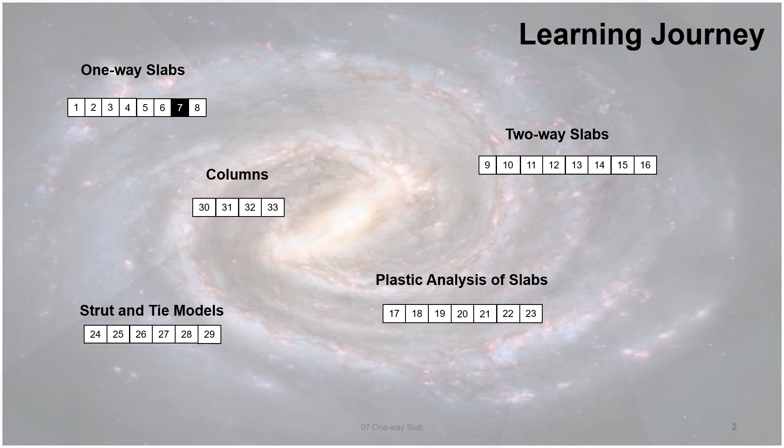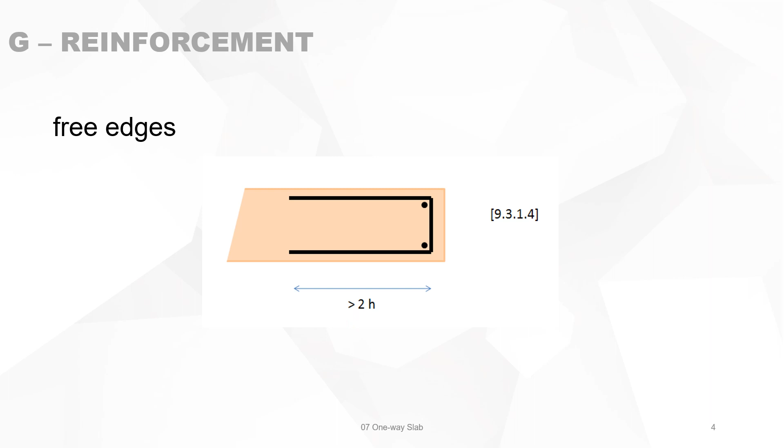Let's look at the free edges of concrete slabs. They always need reinforcement in a U-shaped rebar to close off the edge of the slab. The length of this U-shaped element is at least 2 times the depth of the slab.

The U-shaped corner reinforcement can, in general, be placed as mentioned here: on the outside, in the second layer is the main reinforcement, and the secondary reinforcement is on top of that.

But in fact, you have two different options. You don't need to use all those different layers, because a slab is normally like 200, 250 or 300 millimeters, so you do not have a lot of space.

So for the main reinforcement, you can put it in the second layer, and the secondary reinforcement is in the first layer, but in the same layer as the U-shaped corner reinforcement. That's an improvement, that's better. You avoid buckling out of the main reinforcement because now it's trapped within the secondary reinforcement.

But for slabs, because they are so small in depth, we want to use a maximum effective depth so that we have the least amount of reinforcement. In this case, when the main reinforcement is in the first layer, you can put the secondary reinforcement on top of it and the U-shaped reinforcement on top of that.

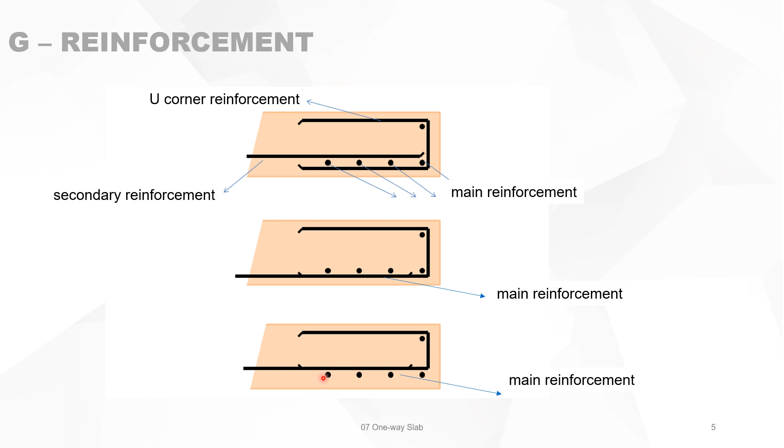Now for free edges, U-corner reinforcements are needed at all sides. You may not forget it. The U reinforcement in the X direction should preferably be placed in the same layer as the reinforcement in the X direction.

And all faces of the concrete need to be reinforced. And all reinforcement must be sufficiently anchored.

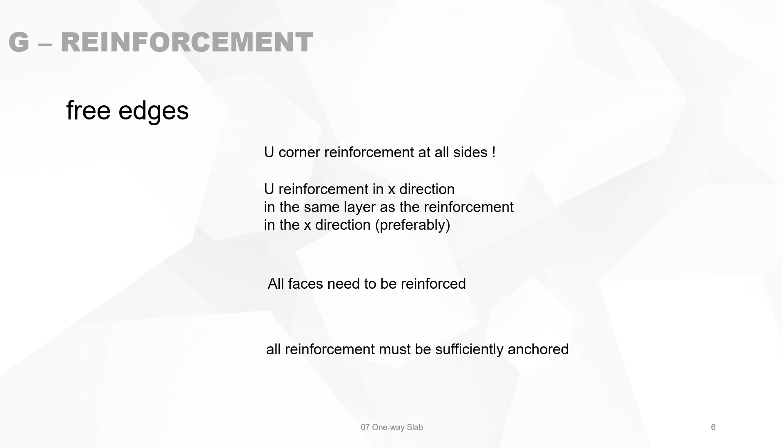Now we can have a quick look at the shear force. Shear force in slabs, in fact, is two-dimensional, and then we call it punching, which video 15 will deal with as punching shear reinforcement.

This is now the shear reinforcement for a one-way slab, and it's treated exactly the same way as for beams, but then for a section with 1 meter width.

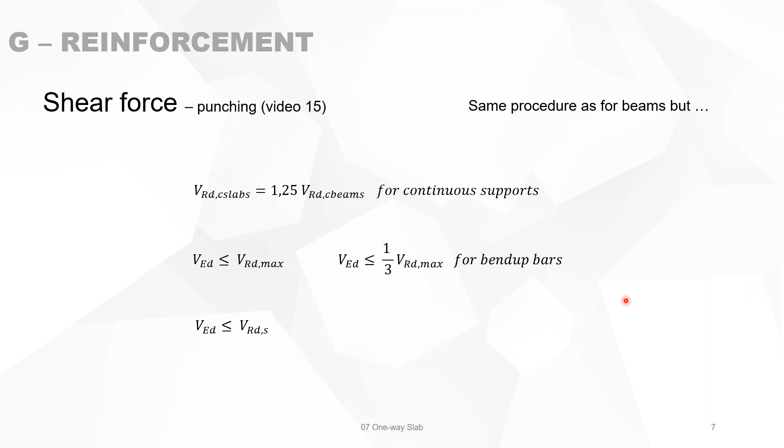There is one big difference: for continuous supports, you only need shear reinforcement if the acting shear is bigger than 1.25 times the resistance of the plain concrete in shear. So you have a 25% bonus. For all the rest, it will be exactly the same as we treated beams.

Now, shear reinforcement in slabs is a complicated thing. We can think purely theoretically about doing it with a precast slab, where the shear reinforcement is already in there, and then in a second movement you complete the pouring of the concrete on top of it. But this is not very practical. It can be done, but it's not very practical.

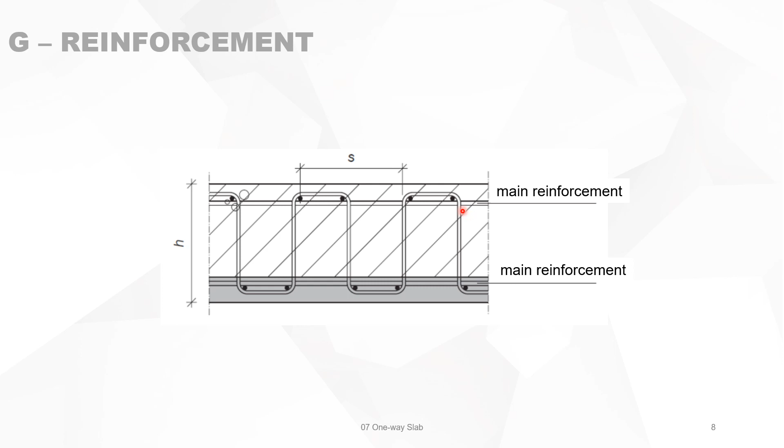Placing stirrups in a slab, you can see immediately that if this is the main reinforcement direction, you need a certain spacing rule in this direction, and you need a spacing rule in the second direction. It is rather complicated to achieve this, and it takes a lot of labor. And stirrups are, in fact, not possible when the depth of the slab is smaller than 200 millimeters.

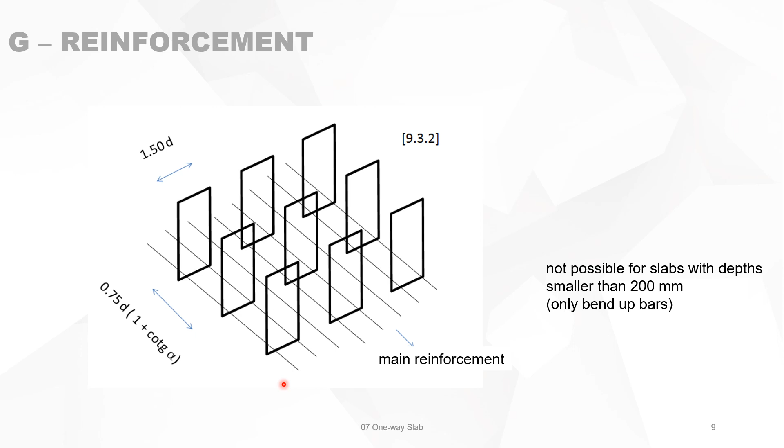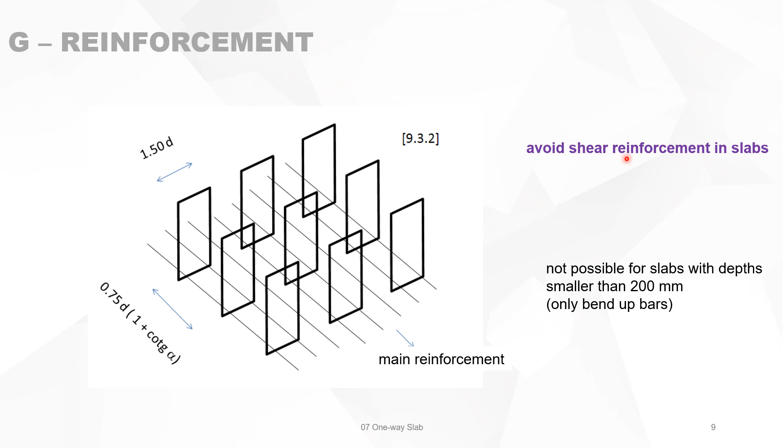Then you can only use bend up bars instead of stirrups. So we can conclude that you should avoid shear reinforcement in slabs at all times. Make the slab thick enough or make the concrete grade bigger, but avoid shear reinforcement in slabs where possible.

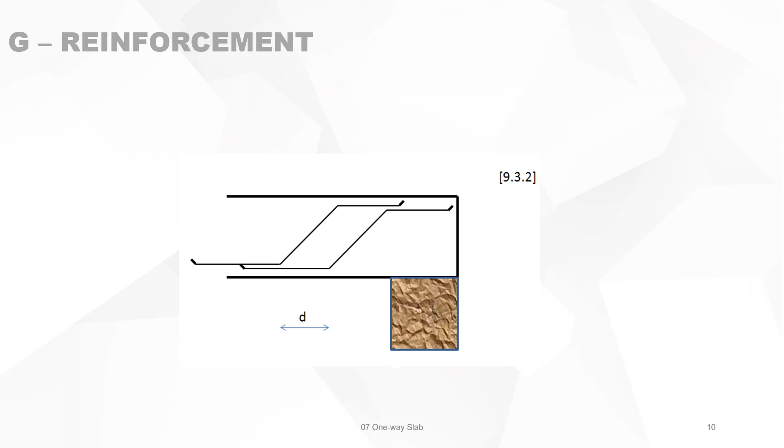Now something about minimum and maximum reinforcement. The minimum reinforcement for brittle failure is exactly the same as for beams.

Now for slabs we can fill in some values, and when FYK is equal to 500 megapascal, then this formula becomes this, which means the minimum reinforcement is 0.156 times the concrete grade to the power 2/3. And it must always be bigger than 1.3 times the effective depth of the slab. This is because B here is 1 meter.

To simplify it, for a concrete grade of C30/37, the minimum reinforcement is 1.5 times the effective depth of the beam. Now the dimensions are right because it's multiplied by 1 meter width, so it is square millimeters, in fact. D is in millimeters, and then you have square millimeters.

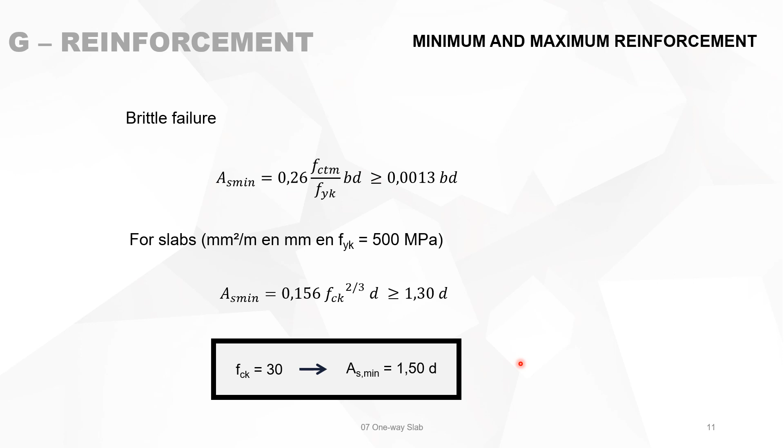For crack control, the minimum reinforcement for crack control is exactly the same as for beams. We can see now that the factor Kc is the same as for beams, it's 0.4 for bending.

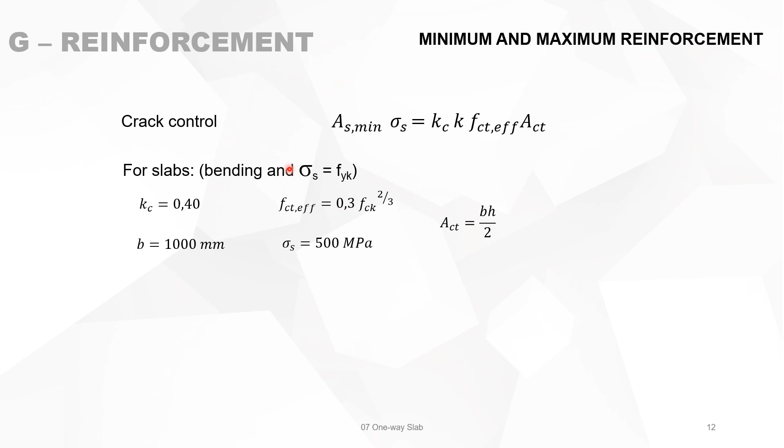And when we use the steel stress equal to the FYK, then you can rework those formulas a little bit. I'm defining A0, the basic minimum reinforcement for crack control, at 0.12 times FCK to the power 2/3 times the total depth of the beam, FCK in megapascal. And the factor K0 depends, it's a dimensional factor.

It depends on the height of the slab, according to these formulas. And now this can be converted into a simple formula like that.

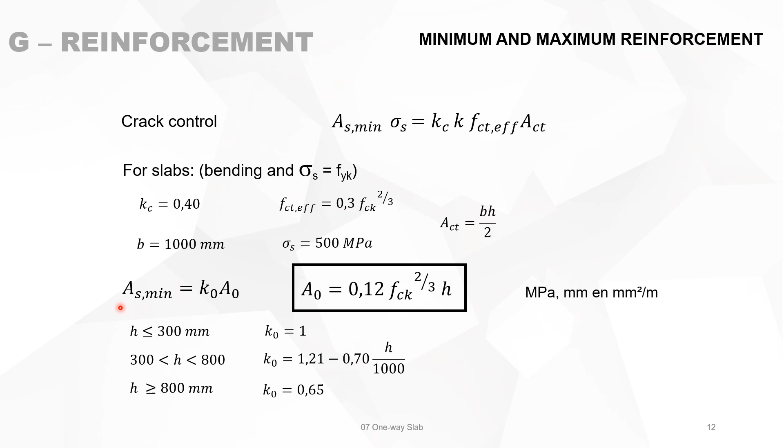Example of restrained deformation of a slab. We can use this formula for that.

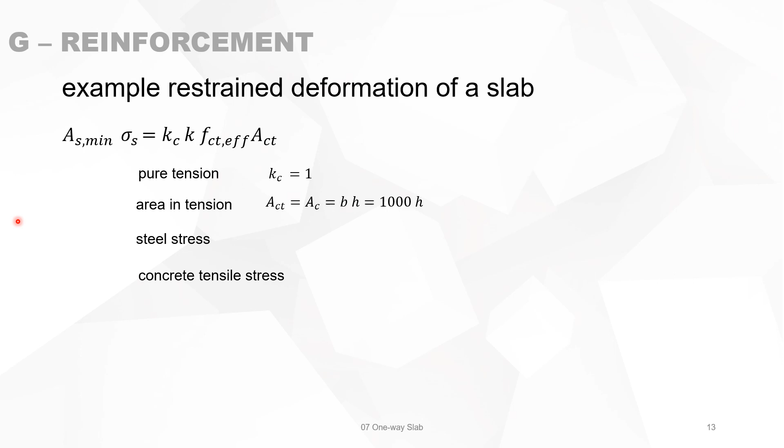For pure tension, Kc is 1, and the area in tension, when it's a restrained deformation, means that the total area is in tension, so it's B times H, or it's 1000 times the total depth of the slab. The steel stress equals 500 megapascal, because I'm not concerned here with a limit on the crack width. And the concrete tensile stress, this is the FCT,eff.

This should be the resistance of the concrete to tensile stresses at the appearance of the first crack, but we do not know that. So FCT,eff is most of the time taken as the mean value of the tensile strength, which is FCTM, or if you don't know, we just take 3 megapascal in normal cases.

And when you apply this formula, then this becomes this formula, which is very easy. The splitting up of the formula is because of that factor K, which is different in different cases, depending on the total depth of the slab.

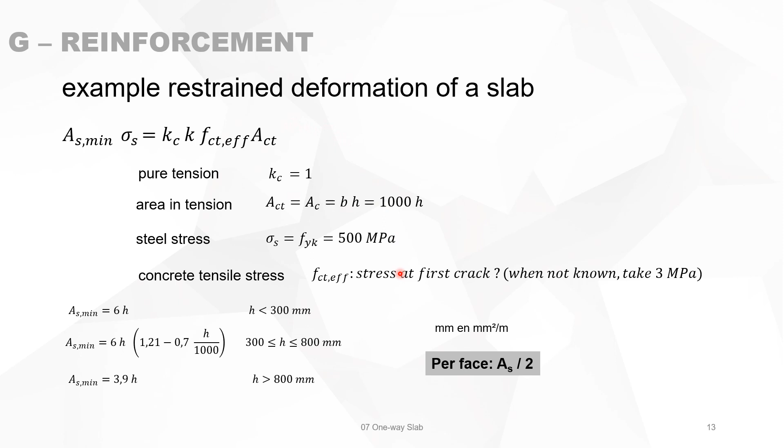Remember, we have chosen here ACT as the total area. It means that when you calculate the minimum reinforcement, the amount that you have, you divide it by 2, and that is the portion put in the bottom and on top. So it's always, when you compare minimum reinforcement, don't forget that for restrained deformation, you put half of it on top and half of it on the bottom.

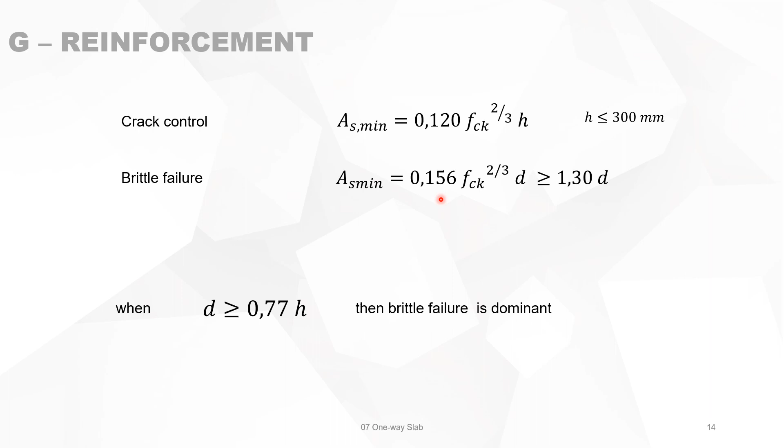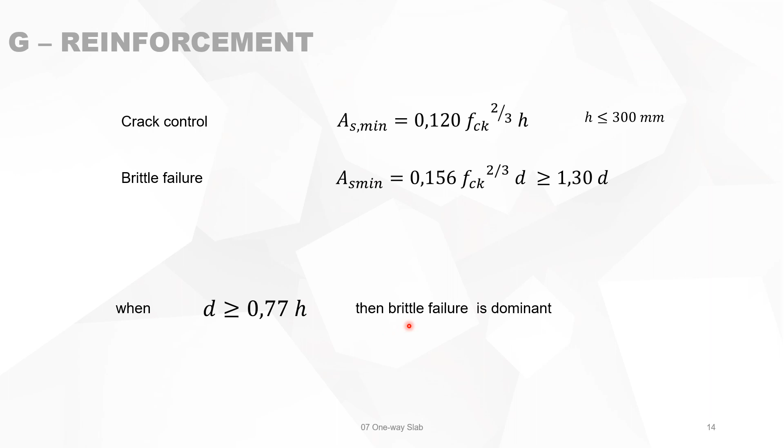For crack control, we have this equation. For brittle failure, we have this equation. Now we can easily see that when the effective depth is bigger than 0.77 times the total depth of the slab, then brittle failure is dominant. So that means that in a lot of cases, brittle failure is dominant, this formula is dominant.

There's also a maximum reinforcement, and the maximum reinforcement is 4% of the total concrete section. For slabs, it means that if you use units square millimeter per meter and millimeter, you see that the maximum reinforcement is 40 times the depth of the slab.

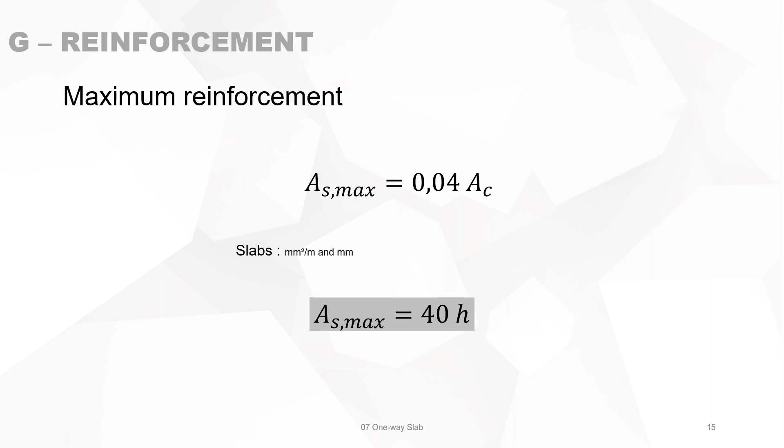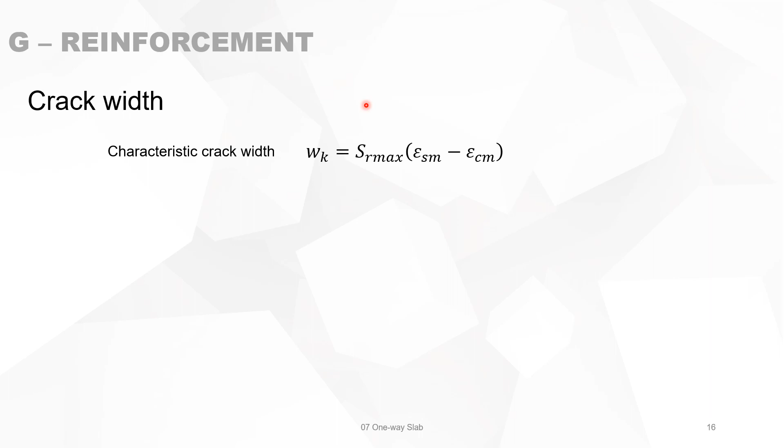Crack width calculations are exactly the same as for beams. Just a small reminder, the crack width is always the delta epsilon multiplied by the maximum distance of the cracks. So the SR max is the maximum crack spacing, and the epsilon SM is the mean steel strain, and epsilon CM is the mean concrete strain.

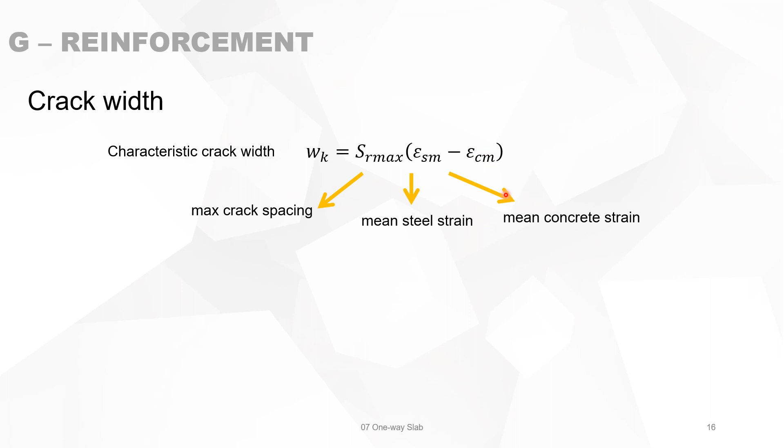And this delta in strain between concrete and steel can be written as this formula, with KT as a factor which is 0.6 for short-term loading and 0.4 for long-term loading.

FCT eff, like we said before, we can take as FCTM, the mean value, which is 0.3 times FCK to the power 2/3. Alpha E is ES divided by ECM, the modulus of elasticity of steel divided by the mean modulus of elasticity of concrete.

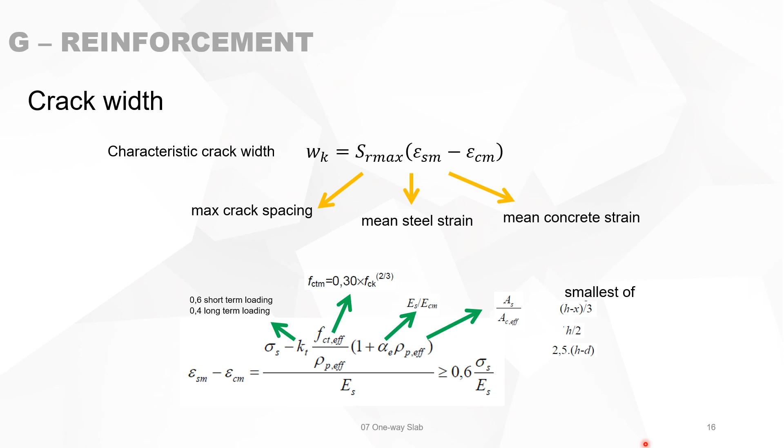The effective reinforcement ratio is the tensile reinforcement divided by the effective concrete area around the reinforcement. The effective concrete area is the smallest of B times h minus x divided by 3, b times h over 2, and b times 2.5 h minus d.

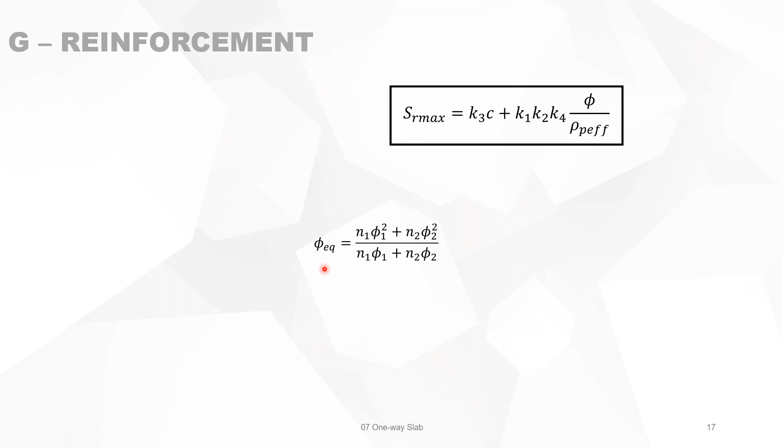SR max is equal to this formula. When you have different diameters of reinforcement in the same section, you have to take an equivalent diameter. K1 is for bond, so 0.8 for high bond and 1.6 for plain rebars. K2 is a factor giving the stress redistribution in the section, and K3 is 3.4.

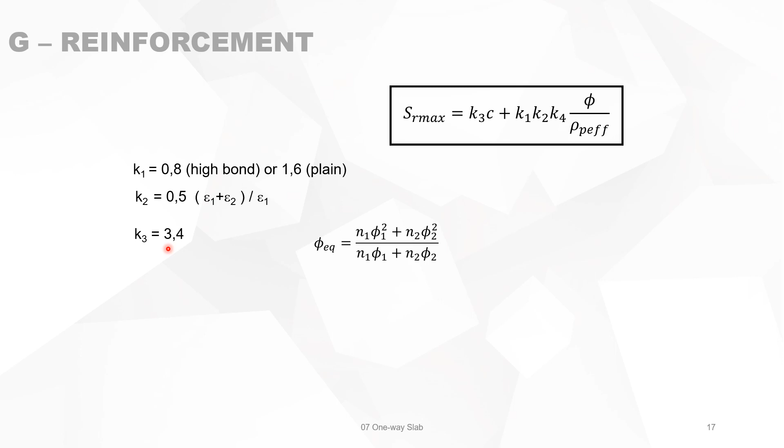It's a calibration factor, and K4 is also a calibration factor. C is the concrete cover. Take care, this is not the actual concrete cover, but the minimum desired concrete cover, C nom.

When there's a difference between the minimum desired concrete cover and the actual cover, you can increase the maximum allowable crack width by this simple proportional formula.

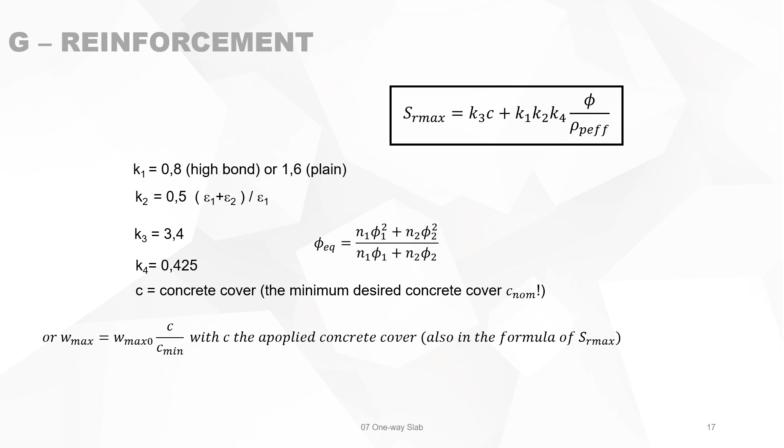Then we have the factor K2, which is dependent on the strain, epsilon 1 and epsilon 2. Epsilon 1 is the greater strain and epsilon 2 is the lesser tensile strain at the boundaries of the section considered, assessed on the basis of a cracked section. So it's the tensile strain at the bottom and at the top, and epsilon 1 is the biggest one.

If this is bigger, then this will be epsilon 1. It's just a definition to arrive at this formula.

Now, in fact rather simple: for pure bending, epsilon 2 is 0, and when epsilon 2 is 0, you see that K2, this factor, is a half. This is for pure bending. And for pure tension, epsilon 2 is equal to epsilon 1, and if you fill that into this formula, you see that for pure tension, this term is 1.

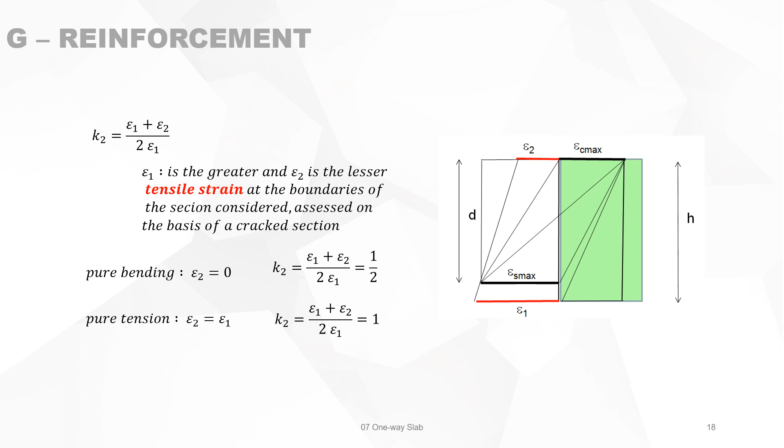SR max is the maximum crack spacing. We have seen the formula for it, but there's a correction of the formula when the spacing of the bars is too big.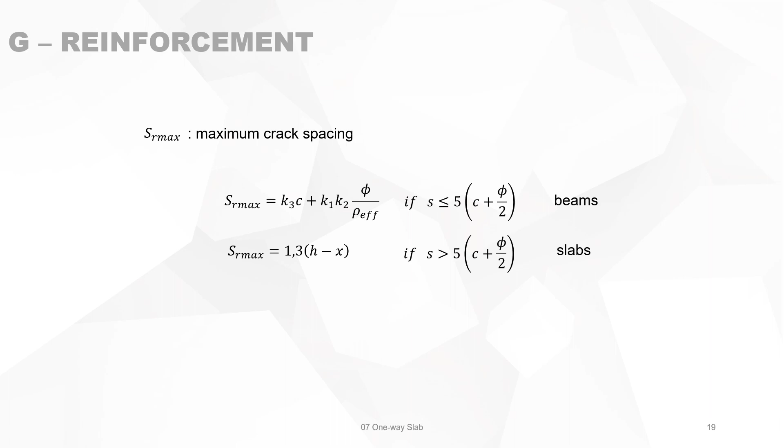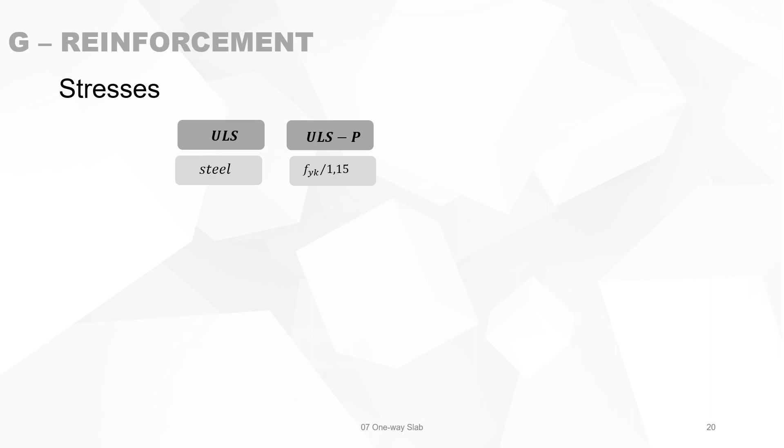Something about stresses. In ultimate limit state, both persistent, the maximum allowable stress in steel is the yield of the steel divided by 1.15. For the concrete, it is 0.85 FCK divided by 1.5.

The 0.85 is alpha CC, and in some countries alpha CC is 1, but in Belgium the alpha CC is 0.85.

In accidental situations in ULS, the steel will be equal to FYK, and the concrete will be equal to 0.85 FCK divided by 1.2 instead of 1.5. And ULS transient will be the same as ULS persistent.

In the serviceability limit state, in the characteristic serviceability limit state, the maximum steel stress is 0.8 FYK, and for the concrete it is 0.6 FCK.

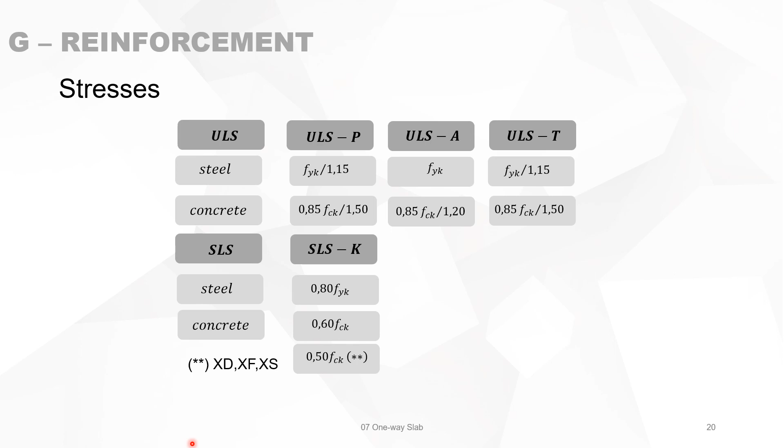But we should be aware that in SLS characteristic, when the environmental class is XD, XF, or XS, then the concrete stress should be limited to 0.5 FCK.

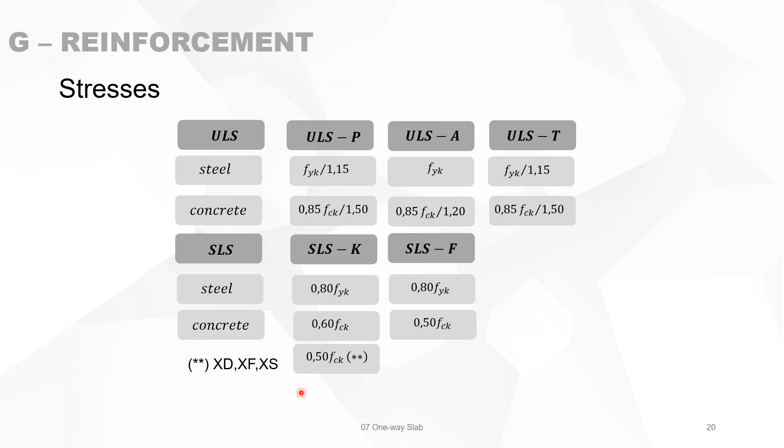In serviceability limit state frequent, we also have the maximum steel stress of 0.8 FYK and concrete of 0.5 FCK. And in SLS quasi-permanent, we have also 0.8 FYK.

But when we have the restraint deformation, it will be FYK. And in SLS quasi-permanent for concrete, the maximum allowable concrete stress is 0.45 FCK.